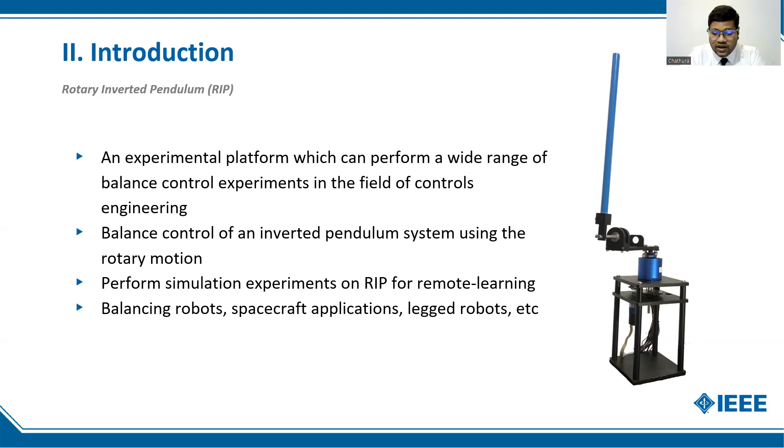In this study, we used the Euler-Lagrange method to derive the nonlinear equations of motion. With the generalized coordinates, we obtained the Euler-Lagrange equations for the rotary inverted pendulum system, as you can see here in the first two sets of equations.

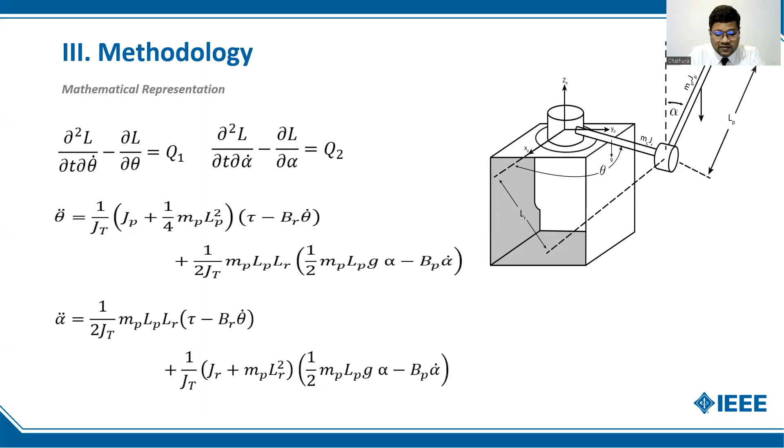Once the kinetic and potential energy of the system was found and the Lagrangian is obtained, we linearize the system equation. As you can see in the last two equations, we derive the acceleration of the pendulum and the rotary arm equations.

After linearizing and solving the accelerated terms, we derive the linear state space of the rotary inverted pendulum system. As you can see, these are the A and B matrices of the rotary inverted pendulum, which we later used to develop the LQR controller in order to perform linearized simulations.

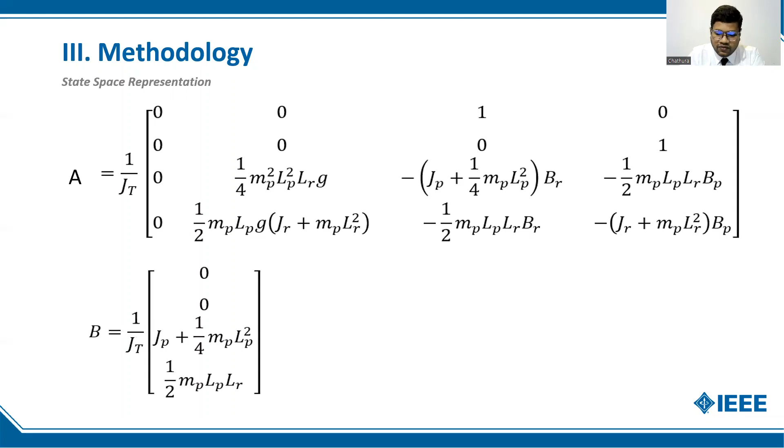At first, we used a fully developed MATLAB workspace script as the system model algorithm. According to the fabricated physical system, we used all identified parameters to perform the linearized simulations to evaluate the system responses of the system for a given step input.

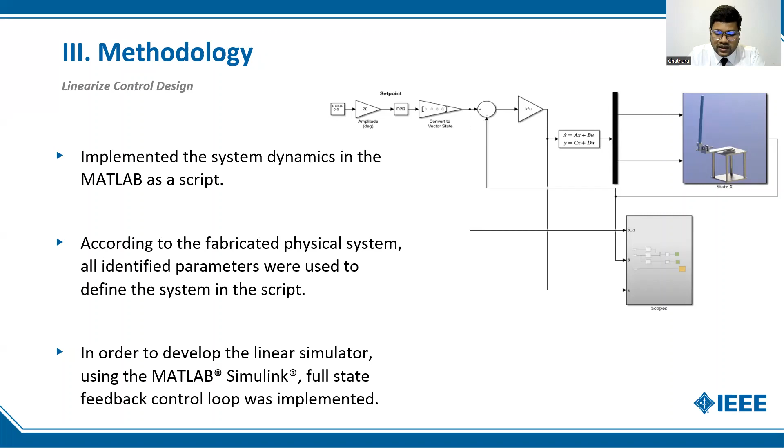In order to design the controller, first we developed a 3D CAD model of the rotary inverted pendulum system using SolidWorks. After importing the CAD model to the Simulink workspace using Simscape Multibody Link, we developed the controller. Here we used a classical controller PID.

As you can see in the video, the rotary inverted pendulum system is performing under a steady state while rejecting external disturbances.

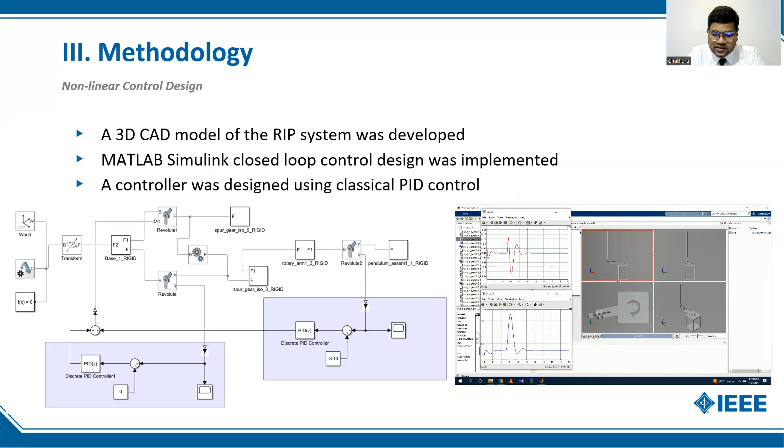As mentioned in the previous slide, we performed 3D simulations on a rotary inverted pendulum system using MATLAB Simulink software. To test the feasibility of performing the simulation experiments on a remote computer, we used video conferencing and remote controlling software, Zoom and AnyDesk. Using this software, we gave controlling access of the simulated model to a person using a different computer. Then we tested the simulation experiment whether we are getting the same results as when controlling it directly. Also, we tested this on different laptop brands and we recorded the FPS rates on each computer.

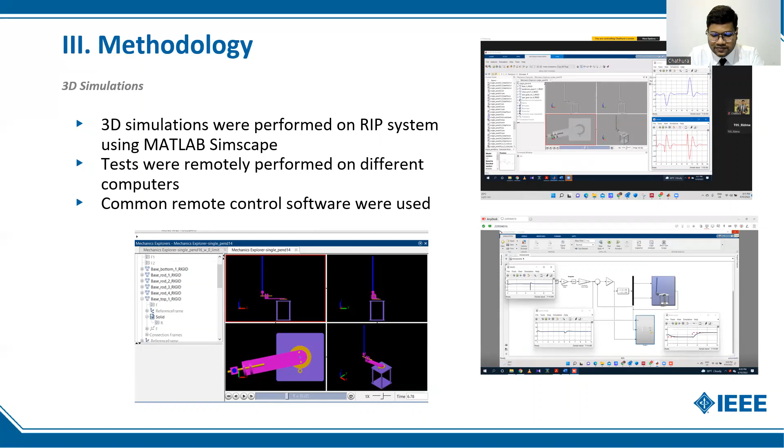After configuring the nonlinear simulator using the defined LQR gain value, which is shown here, and setting up the initial condition of the rotary inverted pendulum system, we performed the simulation. As you can see, the simulated result showed the maximum control input as 2.2 volts and pendulum deflection is around 20 degrees. Especially, the pendulum and the rotary arm have demonstrated a steady state response.

Moreover, after tuning the LQR control Q and R weight matrices, the system reached its stability point in less than 3 seconds. Therefore, it's proven that it satisfies the natural frequency and the damping ratio in the developed control design according to the specifications.

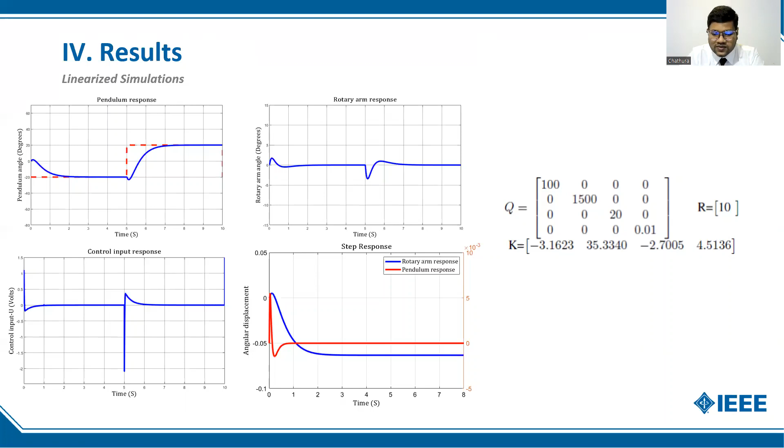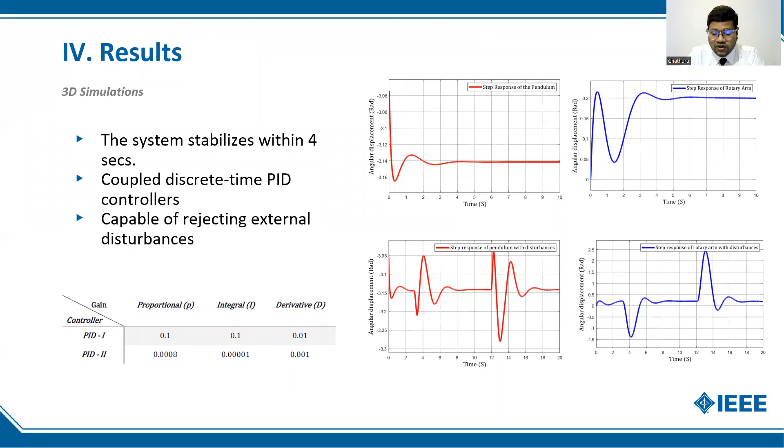In conclusion, in this research, we focused on 2 different objectives. The first one is developing a software system that can replicate physical laboratory experiments. And we successfully achieved that using the MATLAB Simulink software. As the second objective, we wanted to test the feasibility of performing these simulation experiments in a remote computer setting so we can use this as a web-based teaching aid for distance learning purposes.

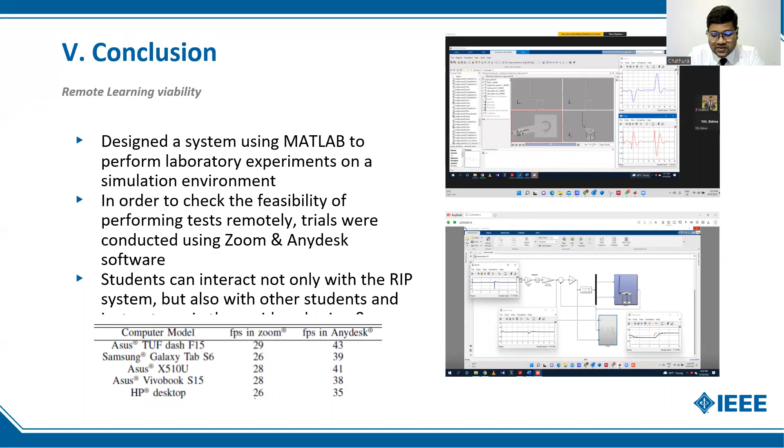As for future works, we are hoping to evaluate the real-time physical test bed and compare the results with the simulation model. After all the fabrication process, more advanced control approaches will be experimented with and comparisons will be performed. After a successful number of control design tryouts, the swing-up control for both the simulation and the real-time physical test bed will be performed.

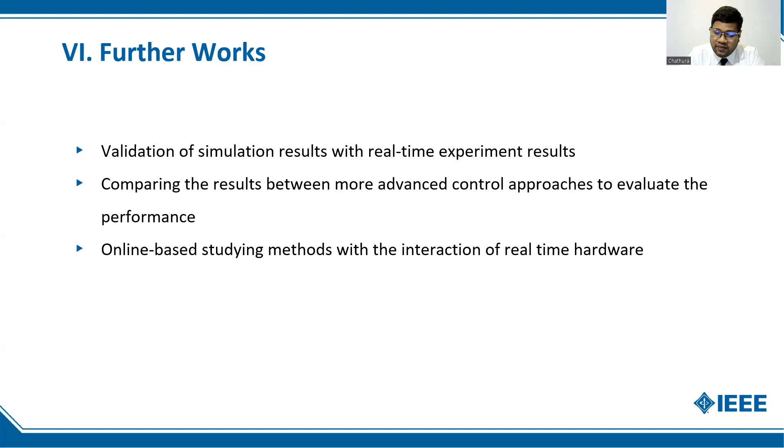Lastly, it is proposed to develop a system where students can perform these laboratory experiments by interacting with the physical system remotely. This will benefit a lot of students who don't have access to such laboratory apparatuses in their university or in their country.